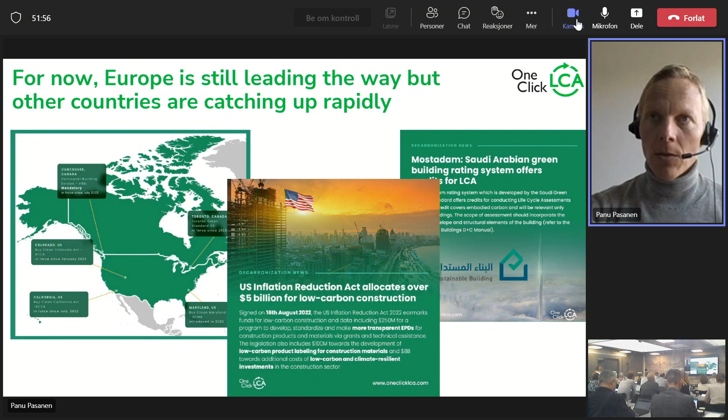And in Asia, we also see positive things evolving. And very recently, we had a first mover in the Middle East to actually implement anything resembling a building LCA there, on the voluntary side. That's it for the global context, but Europe needs to clearly keep up the pace to continue to be the leader.

We are doing a project, European Construction LCA Regulations Review, which is due to be published this fall. This project has been generously supported by the Finnish government through the Ministry of Environment, and the Dutch government through the Netherlands Enterprise Agency. So thank you for making this possible.

We cover in this work the three countries with regulations in force: Sweden, Netherlands, France; the other Nordic countries which are putting forward regulations; as well as a few other Central European countries plus UK, which have rules or systems for public projects, and where we may find the basis of future regulations for the broader market.

This is a fairly technical study, made for the people who need to design and implement regulations. So we are looking at a number of detailed parameters. We are looking at the review at an overview level: 12 countries plus EU as a block, all where governments are active in this. And then, of course, there are many countries in the EU where governments do not show any activity, or material activity as far as we can tell in this matter.

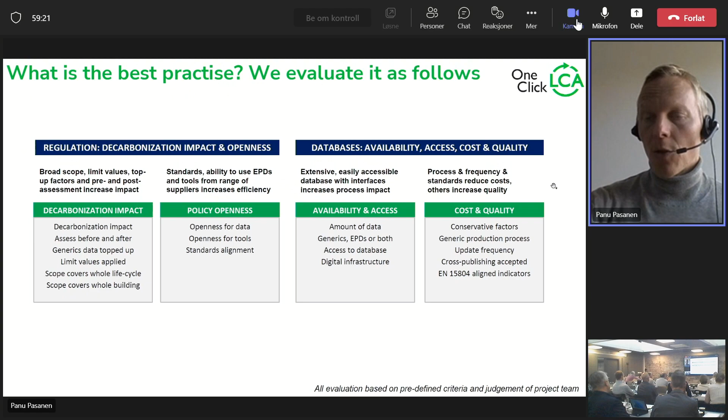The other highly impactful policies are the Dutch MPG, the Bæredygtighedsklassen, the Finnish method, and the Part Z and GLA method from the UK. All of these are among the more impactful methods. They are mainly differentiated by the level of openness, whereby the MPG and the Arrêté 2020 are extremely closed.

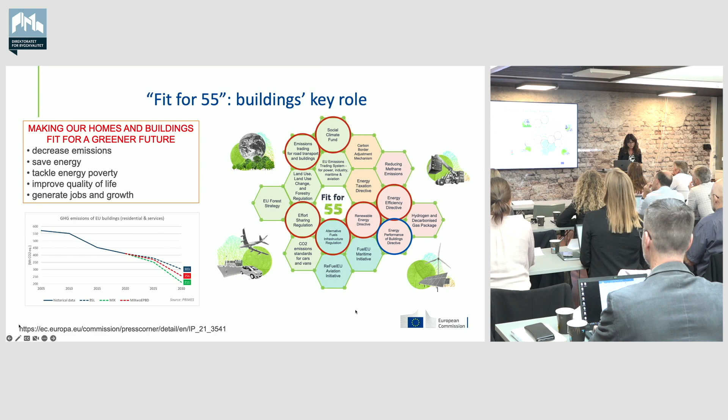If we have a look at the 2030 goals, we have the so-called Fit for 55 package, and we are really updating EU law in order to meet this target. The Energy Performance of Buildings Directive is part of this package, and the strategy is really based on three pillars: energy efficiency, energy saving, electrification, and of course boosting renewables and innovation.

I will also shortly go over the main strategic document. So you have the renovation wave. It was launched in 2020. The goal is really to double the renovation rate and to foster deep renovation.

What is very interesting is that it's a holistic approach for the built environment, and circular economy and life cycle thinking are important dimensions of this document.

To finish on the overall picture, some words on the Repower EU plan. It's following the Russian attack on Ukraine. It's the European Commission plan to reduce dependence on Russian fossil fuel and also to foster the green transition. So the Repower EU plan is a plan for energy saving, for producing clean energy, boosting renewables and diversifying energy supplies.

But this plan has an impact also on the building side. A new article is proposed to be included in the Energy Performance Directive, to include the deployment of solar technologies on commercial and public buildings and also for all new residential buildings. So it is an additional article to the EPBD. The European Commission really calls to increase the ambition and the adoption of the Fit for 55 package.

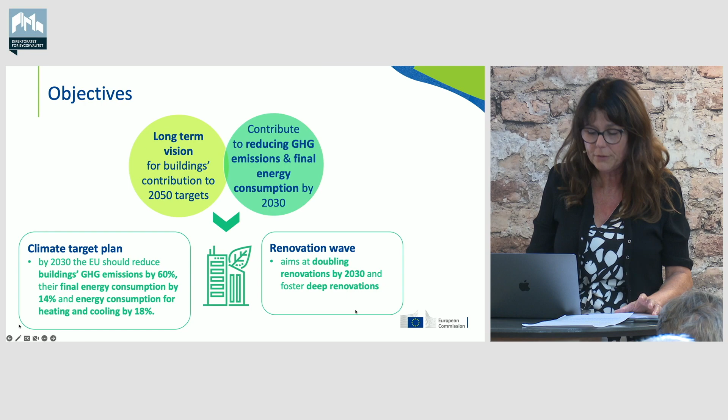The objective of the EPBD is really twofold. On one hand it's to contribute to reducing greenhouse gas emissions and final energy consumption, and with the current geopolitical context it's more important than ever. But it's also important to include the EPBD in a longer term goal, to put us on the right pathway for the 2050 decarbonization goal.

In a nutshell, you can see the 4 focus areas of the EPBD: you have renovation, of course, decarbonization, some provisions regarding modernization and system integration, and of course financing. With financing, the priority is really to the vulnerable households.

Sorry for the slide. Regarding...

If we want to have this new vision for the building stock, it was important to introduce a new definition for zero-emission building - what we mean by zero-emission building. It's really a building, for the new building and also for the overall building stock by 2050. The idea is really to have a building with very high energy performance, translating the energy efficiency principle, and it should be covered by energy from renewable sources. You also have some requirements to foster e-mobility and so on.

But if we just stop here, we won't be able to decarbonize the full building stock. We have to look beyond, to the full life cycle of the building - what's going on before and after the use of the building. That's why it's the first stage in the EPBD to introduce, to address carbon emissions. We have 2 provisions for this.

One is in the National Building Renovation Plan - they must include policy on reduction of whole life cycle greenhouse gas emissions. So we have this provision, and the other provision is to have a mandatory calculation of the whole life cycle global warming potential for new buildings and large buildings. This will be reported in EPCs.

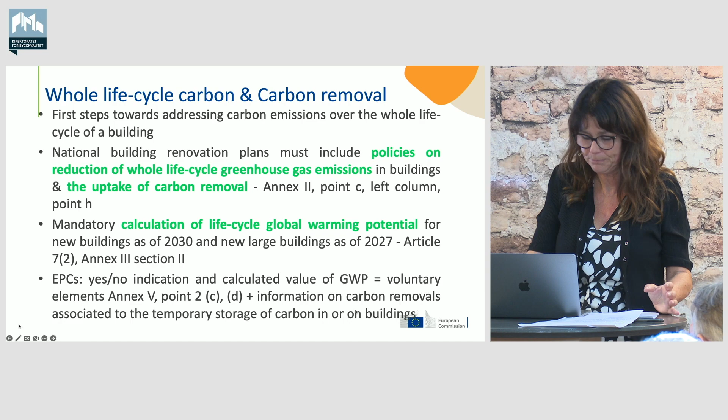Just to mention that this is a directive, so of course member states can be more ambitious, because as in the Nordic countries, you are working a lot on this. So it's to show the way also to other countries.

Regarding the global warming potential, we don't define the calculation method - we just make reference to levels. The European framework, already mentioned by other colleagues, and this method refers to the EN 15978. We are talking about tools, and there's also flexibility regarding the tool and the data.

We are referring to the construction products regulation, what it will be available. If I go very briefly regarding the other provisions, so you have some on a more short term.

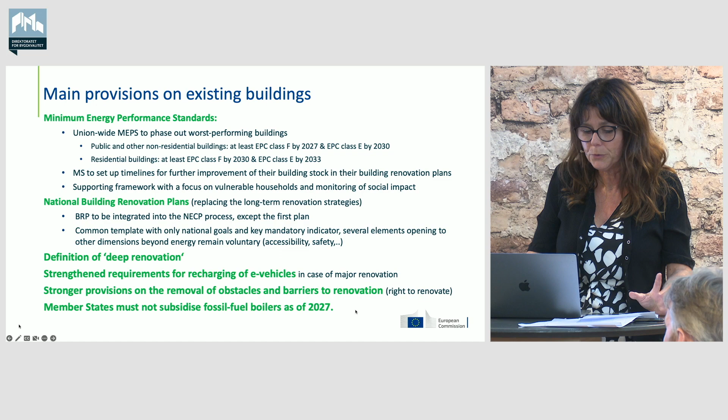The idea is really to introduce minimum energy performance standards, to trigger efficient energy renovation of buildings, starting with the worst performing ones. We have introduced also a definition of deep renovation, and various other provisions on existing buildings.

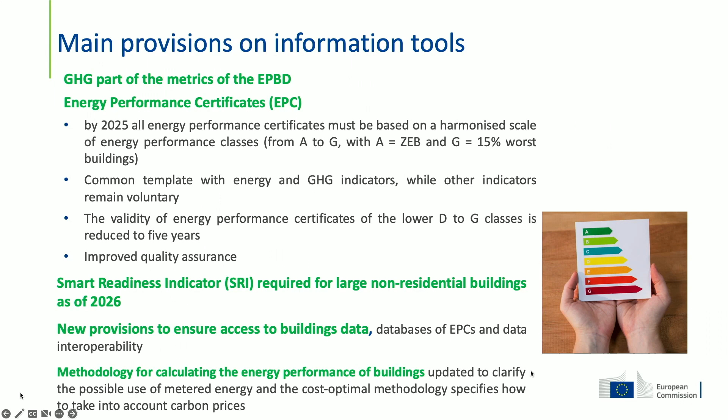Regarding the main provisions on information tools, we want to strengthen the energy performance certificates. The idea is really to have a harmonized scale at European level from A to G, and it's really a work to try to have more harmonization on this very important tool.

You have some links. If you have more information regarding the revision, I will be happy to reply to questions. Thank you.

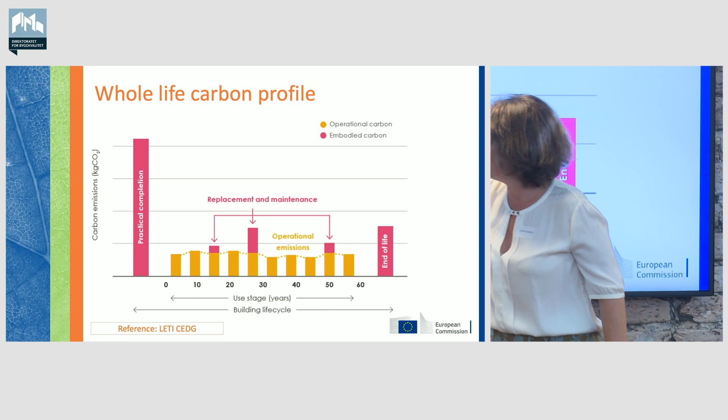What's interesting to think of, of course, is that this one we can control now. What happens here, to a part, is controlled already at this stage, because we decide how energy efficient our building will be. But we cannot know exactly what will happen here, of course it depends on many things. But what we do know is what happens here, so that's the upfront carbon becomes really something that we can steer early on.

So far, at least at the EU level and in most member states in the EU, policy has been focusing on the yellow bit. We are now looking at taking all of this into account somehow.

When it comes to policy development, I would like to split that into two steps. The first step is to start to require the assessment of whole life carbon, as we call it, and the reporting of it. The second step then would be to start to introduce different kinds of quantified targets, limit values potentially, and so on. So those are two different steps. We are currently at the first step when it comes to the EU level.

So why is this important? Well, first of all, it is a first step to be able to get to the second step one day. But also, we see it as a way of spreading knowledge and understanding of what different actors in this value chain contribute with, and how different decisions that you take during a life cycle of a building project have an impact. It is, of course, to generate data, which we need for many different reasons.

And it's really also a soft approach to start to reduce whole life carbon, because what we hear from those who have started to require the assessment and reporting is that it triggers a reduction of whole life carbon, because if you know you're doing something in your project, you would like to do it better, most likely. We already see this requirement to assess and report in some different building policies.

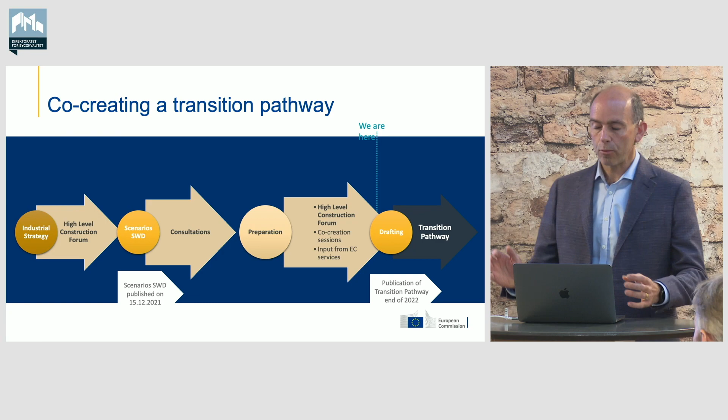We've been developing this work with the High-Level Construction Forum, which is a forum of member states and also various stakeholders, industry, NGOs, and public authorities, and so on. We published a document at the end of 2021 for consultation, and now we are going through, close to the end of the process, where we're drafting now the final transition pathway document.

It went through various stages, first of all, in the forum, setting out the scenarios for the transition. First of all, the first ideas that came in the staff working document, then more consultations and events and so on. And then we've had dedicated sessions in the forum, which have been voting on and deciding what should be the priority areas for action.

And what the transition pathway is looking at is a range of things, but whole life carbon has been voted by the forum as one of the number one priorities to look at. It's also looking more widely at circularity and waste and the renovation wave that we've heard about. But also the digital transition is very much an enabler for a lot of this.

So the collaboration tools like BIM, the automation on the building site, but also in prefabrication plants with robotics and so on, and the better use of data and product data, not only for whole life carbon assessments, but also data for improved productivity as well.

And then there is the whole side of resilience, and here, the current situation with the war in Ukraine and the high prices is very much at the heart of this now, and the pressure that's being put on supply chains, the pressure that's being put on the availability of skilled labor, and the overall competitiveness of the ecosystem. And then other challenges go right across all of this. Things like research and innovation and procurement are all relevant. So it's going to pull all this together.

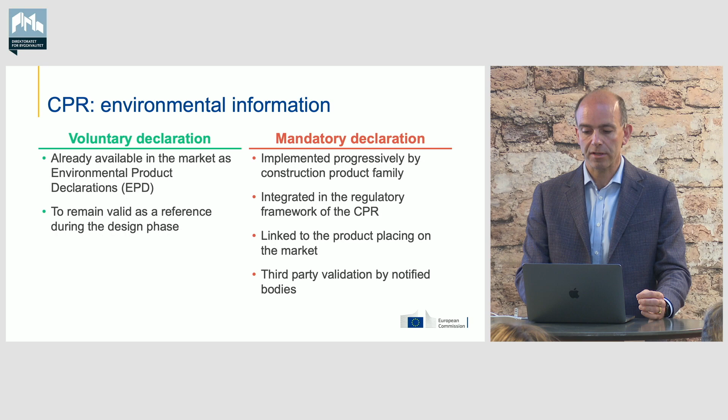Under the revision, we also want to implement progressively a set of mandatory declarations of environmental criteria, starting with global warming potential, or carbon footprint. This would be mandatory for construction products, and this process will be integrated in the regulatory framework of the CPR and linked to the placing of the product on the market. Third-party validation will be done by notified bodies. So overall, we want to ensure the harmonization of the reporting of environmental performance across the single market.

Diving more into the detail of the CPR revision, especially when it comes to how we want to make a circular economy happen in construction, there are several elements that will facilitate circularity, and they are spread across the regulation, as you can see, in various different articles.

But in general, we want to make it easier for reused and remanufactured products to access the market. We want to improve information, especially digital information, relating to circularity. We want to offer maximum flexibility for circular solutions to level the playing field with new products, and we want to make it easier to avoid surplus products becoming waste and to close the material cycles.

So in order to meet the EU-wide climate and energy targets, it's also vital that we direct investments towards sustainable projects and activities. And to achieve this, we need a common language and a clear definition of what is sustainable.

This is why we have an action plan on financing sustainable growth and the classification system for sustainable economic activities called the EU taxonomy, and a first delegated act for sustainable activities for climate change adaptation and mitigation was published in December 2021, and it's in force since January this year.

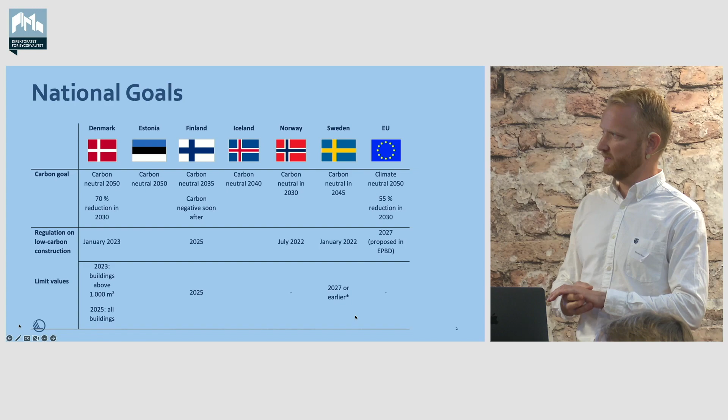When it comes to the regulation and implementation of building LCA within the construction or building codes, some countries are working on this, and some have already implemented. We saw a little bit about this in Pano's presentation earlier, but Sweden and Norway have already implemented the first set of regulation on this. Denmark will follow shortly in January next year, and Finland will follow in 2025, maybe 2024. We'll see.

When it comes to the limit values, Denmark will include a limit value already in the first set of legislation for buildings above 1,000 square meters. Finland will include limit values as well, and Sweden is already looking into what should be the next step of the regulation. Estonia and Iceland are working on the subject, developing proposals for methods, but haven't made any political decisions yet.

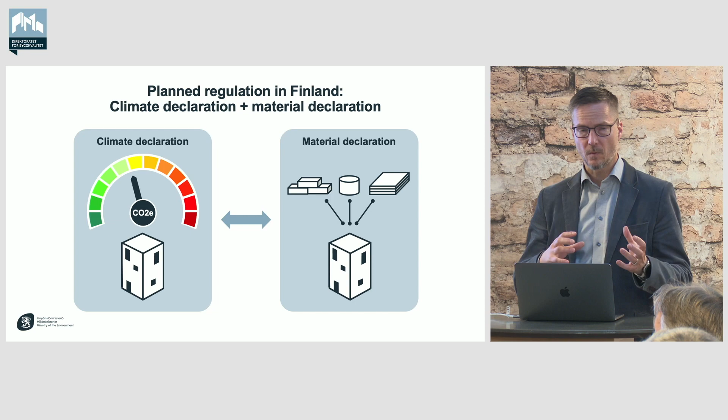But what I will do is explain to you what is the framework that is required for the limit values. As just has been explained, we are going to have 2 new decrees, one on the climate side and one on the material side, and these are both linked to the question of limit values.

If we first look at the climate declaration side, it's going to include information on carbon footprint. This is going to be mandatory for all buildings that will require a building permit and that need to have an energy performance certificate.

If your building requires an energy performance certificate, then it will require a climate declaration. And for new buildings that mustn't exceed a certain E value in their energy performance certificate, there will also be a limit value. So we are trying to do this hand in hand with the existing energy performance regulation.

Then there is another side to this climate declaration, which is what we call with the umbrella term carbon handprint. These are the potential climate benefits based on European standards that include the classic module D circular economy benefits, long-term carbon storages. We heard interesting news about those earlier today when the European level plans were presented.

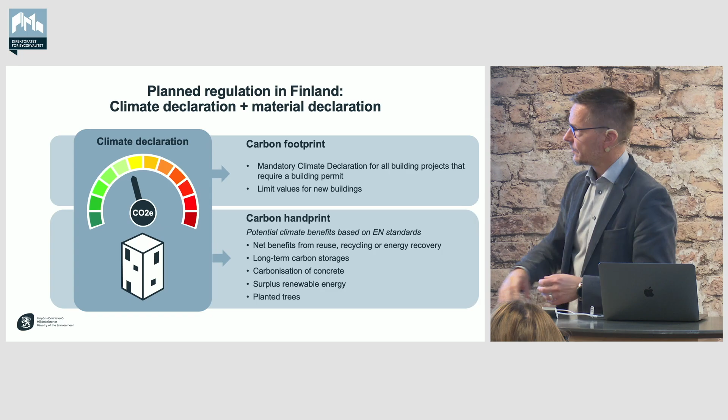Then we have carbonization of concrete, surplus renewable energy, and we are also looking at what could be the role of trees. If you plant new trees, say on a brownfield site, how much can they sequester carbon during the assessment period? However, the limit values will only apply to the footprint side.

There wouldn't be limits for the handprint, but we hope to boost the markets to compete with the size of the handprint.

Then what's linked to this is indeed the material declaration. It's going to include information on building components of the object of the assessment, materials within these components, at the moment breaking down to say 12 different categories, and then the origin of materials, whether they are renewable or non-renewable, recycled or even reused, or if there are any harmful substances.

And this is linked to the limit value discussion so that the scope will come from here. So what you will calculate in your life cycle assessment is basically the scope of the building components that you have in your material declaration.

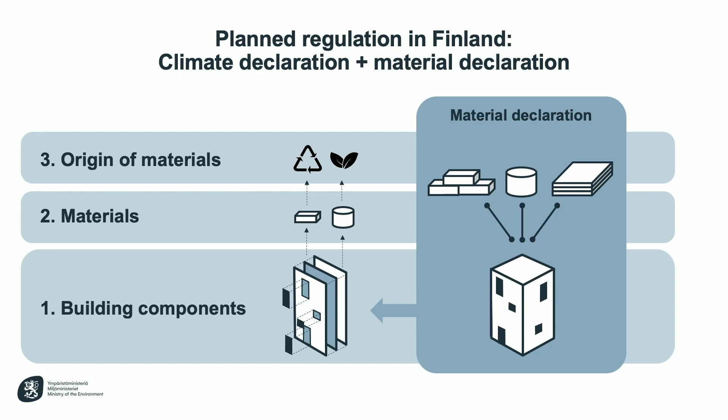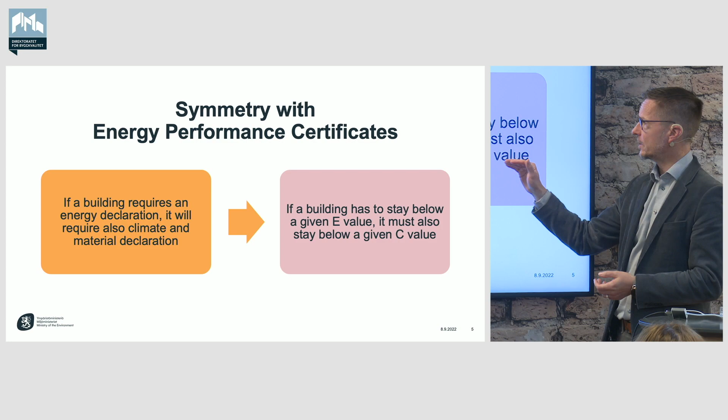But this document will serve other purposes as well than just the climate declaration. So what's been important for us is that we would like to seek symmetry with energy regulation. So again, if a building in Finland requires an energy declaration, it will also require climate and a material declaration. And if it has to stay below a given E value, it must also stay below a given C or carbon value.

So we felt that this is important for the sector, which has learned that okay, these and these building typologies need to go through a certain process, and there are buildings that are excused of that burden, if you will. So we want to keep it the same way.

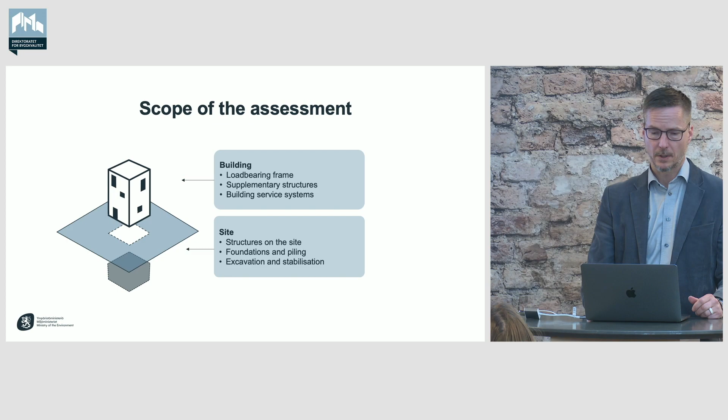So in terms of the scope that is included for the limit value assessment, we will be looking at the building and the site separately, and the limits would only apply to the building. So its frame, whether it's underground or above ground, doesn't matter.

But then what's on the site, say foundations and piling and excavation and stabilization, these we consider are choices made in city planning, not in the building design. And therefore we are planning on excluding those from the limit values. And of course the limit values will be defined for different use classes separately.

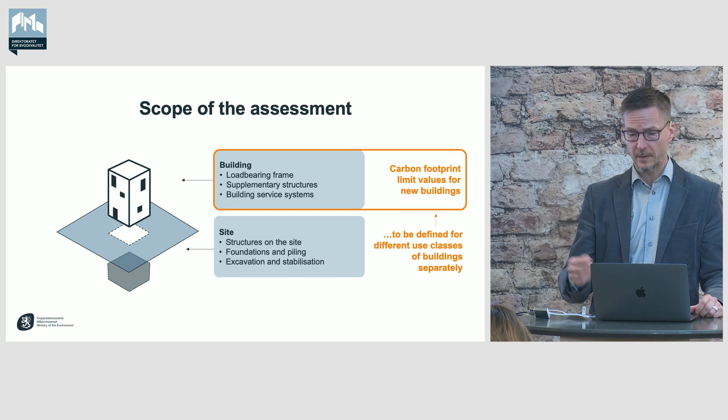So how to speed and enhance the uptake of the limit value thinking then? Our recipe for that would be building information model. When in the future one would be applying for a building permit, we have planned that you would need to give in, also upload your building information model. That's going to be a mandatory requirement for getting a building permit application.

And from that model, we would hope that the professionals would automatically generate the material quantities that you need in your calculation of limit values, because that's, as many of us know, the most time-consuming stage in life cycle assessment, and the one that is most prone to errors, and in which the machines are better than humans.

So this material quantity takeoff would be used then for both material declaration and climate declaration, and we would get from this side the material contents for building products, and for here we are looking at the emissions of building products.

And the data for which the limit values would then be calculated with would come from either environmental product declarations or from the existing national generic database, which is available for everybody who is interested in English at the website co2data.fi.

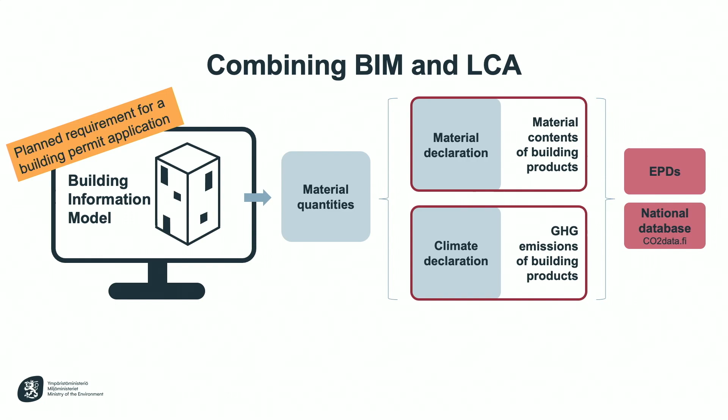Still something about the building information model: we are also planning to store that in IFC format for future use, so the information wouldn't just be used for making the limit value regulation possible. The overall thinking is that the BIM tool would be communicating with the LCA tool, and you would iteratively get quantities out from your BIM tool to your LCA tool, and then the LCA tool would give feedback to your design so that you can secure that you will keep below the given limit value throughout the design process.

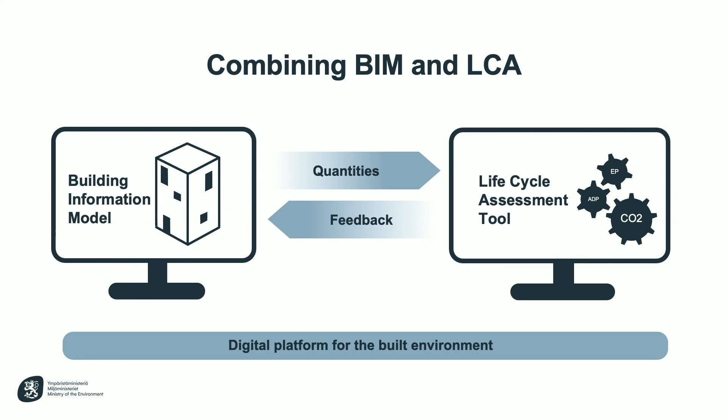And all this would then be saved or uploaded to a digital platform for the built environment, which is going to cover, as the name implies, the entire built environment, from product level to buildings to cities and to entire countries. So we would like to start following the flows of carbon and flows of materials, and currently we are building a digital platform for this subset of the entire value chain.

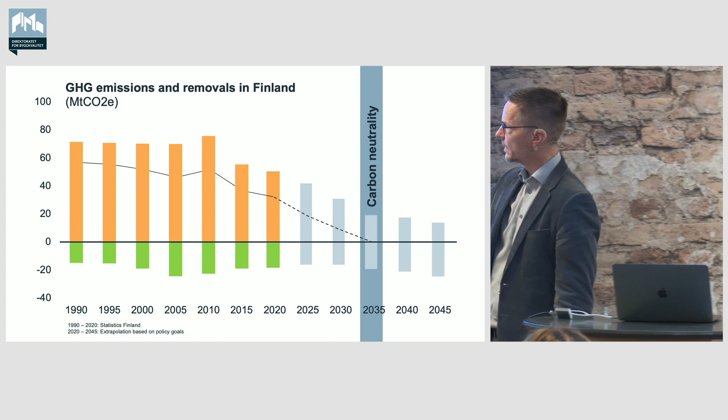And I'd like to finish with the quest we also have ahead of us: our goal to become carbon neutral in 2035 requires that we very well understand how much of this emission side we need to push down, how much of this comprises new buildings, and how can we, in a compatible manner, compare the emissions that come from construction projects to national climate goals. That's something that I believe requires methodological development, but is also super helpful if we can get it working, because otherwise I don't ultimately see a very big point in the exercise of making LCA if it doesn't really support your country's climate goal.

And furthermore, as we have the goal of becoming carbon negative, then increasing the sinks here also justifies our approach to including the carbon handprint side, so that we can start to manage that also in the context of the built environment. This was the latest from Finland.

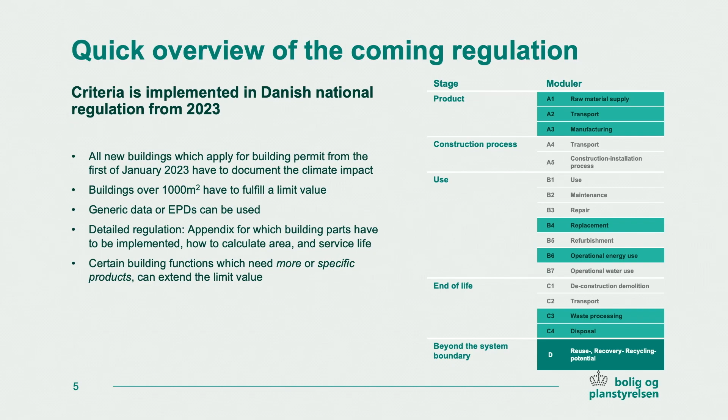And then we have been working quite intensively, also together with BUILD, the research institute, on a few buildings which we assume will not be able to be within the limit values because they have certain functions, for example some hospitals or some laboratories. So we have been working on some certain regulation for them, but I will come into that in a second.

And that was the ambition they wanted to set in the beginning, and this was the baseline for the political agreement. Then we have been working on how to make the regulation based on that, and we could not go too far away from the baseline which has been set there, the methodological basis. So we were kind of stuck into a lot of things, but we worked with it in the best possible way.

Shortly to the report from BUILD, they looked into just 60 buildings, which is not a lot if you think about that we are building like 7,000 buildings in Denmark per year. But it was the best baseline we had back then.

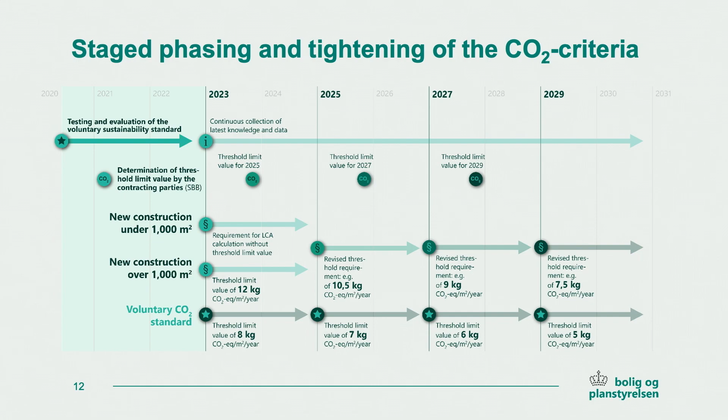These are a lot of points, and I will not have time to go into all of them, but we will, for example, look into representing the existing building mass with more cases than 60 buildings. Out of that, the political parties can decide how much they want to tighten them. We also want to look into where we should put the limit values in regards to our Danish carbon budget, and how to do it.

How can we make the link between our LCA criteria and the carbon budget, and is it even possible? We will also look into whether we can maybe add some more modules or phases of the life cycle of a building.

Yeah, and a lot more things, as you can see here, but I think my time is over. Thank you very much.

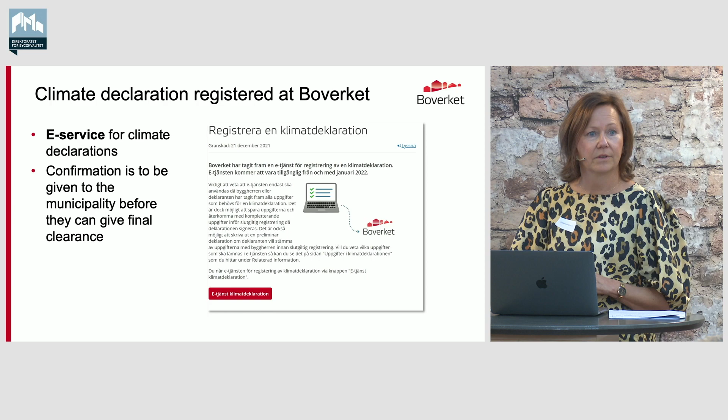We're responsible for the supervision. We will check the accuracy and whether the data that they send in the declaration are reasonable. The developer needs to save the basis for 5 years, so we can request the basis, more information that they register to us, where we can check the quality of the data.

We are now building up an e-service so they can handle this basis in an easy way, and we try to adjust to the type of tools that they are using in the sector.

So some of the important elements for us when we do this supervision is to check level of coverage, how many products are included in the climate declaration. They also need to verify the products used. At least half of the products from the climate impact, they need to verify that they really put this product into the building. We also will check when they made this final calculation.

We know in the early stages you don't have all the information, so we want to really see when this calculation is made, but also if there have been updates. We know that they sometimes change the products that were calculated in the beginning. We want to know if there have been any changes that might affect the climate impact.

These are important issues when we introduce limit values. So we're looking at putting a level on the coverage, also a level on the verification, and also setting a date: when can you make this climate declaration, when can you send it in to us, and also clarifying the updates that are needed.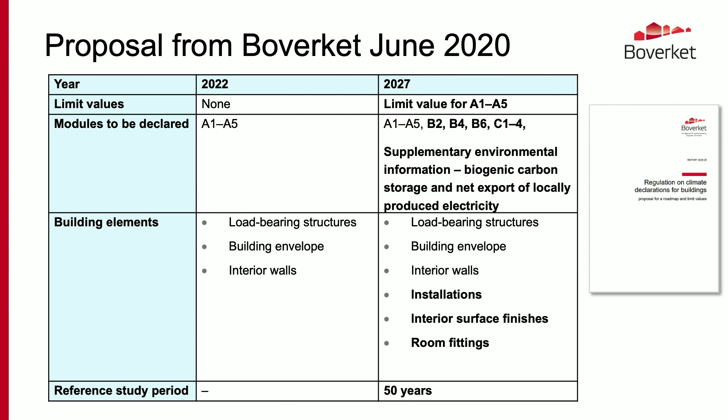So our proposal from 2020 was to introduce limit values for module A1 to A5, and this is what we are working on now. But also to expand the climate declaration to include more modules, all building life cycle stages, and supplementary environmental information. We also propose including more building elements, installations, interior surface finishes, and room fittings, and a reference study period of 50 years. This report is also available in English if you want more information.

The study on reference values from the Royal Institute of Technology looks at climate impact from construction of new buildings built during 2015 to 2020. This report is from December 2021, and we now have reference values for detached houses, multi-dwelling blocks, offices, and nursery schools and schools. It's a small study of 68 buildings, but we think it's quite robust material for us to continue with on limit values.

So the proposal presented at the hearing in late August was that it looks possible to introduce limit values in 2025. We're working on a proposal, and I really want to highlight this is still a proposal for new buildings and extensions, for module A1 to A5, and we also include more building elements in those limit values.

But we also propose that at the same time, in 2025, we extend the climate declaration, more or less according to our 2020 report proposal, to the whole life cycle, more building elements, and also expand it to extensions, reconstruction, and earthworks. But we really need to look closer at whether the industry is ready for this next step and to include so many things. We need to look closer and make an impact assessment.

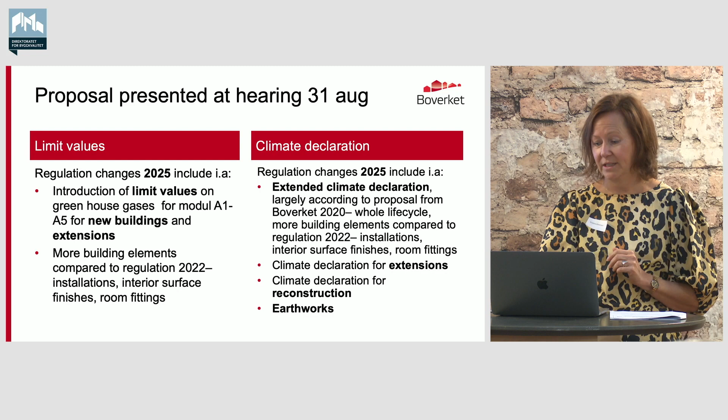I want to give you some hint on the limits we're working on—this is a complex picture and we have too short a time, but I'll try anyway. This covers all 68 buildings in the study across five different building types. We've set a line at the top at the 75th percentile, meaning 75% of the studied buildings, not the level of emissions, are below that line. That's what we call our baseline or reference value.

So we're looking now at whether we should decrease emissions according to that line. Our proposal for 2020 was 20 or 30% lower than a reference value, that reference value being the 75th percentile. That is what we are currently working on.

The proposal at the hearing was to introduce a limit value at the median, which is a little above 20%—meaning less than 20% lower—for all building types except nursery schools. This is something we're looking closer at. At the public hearing, they thought this was a reasonable introduction of limit values, but we need to look closer, especially at the effect on small and medium-sized companies. The big companies are quite prepared for this.

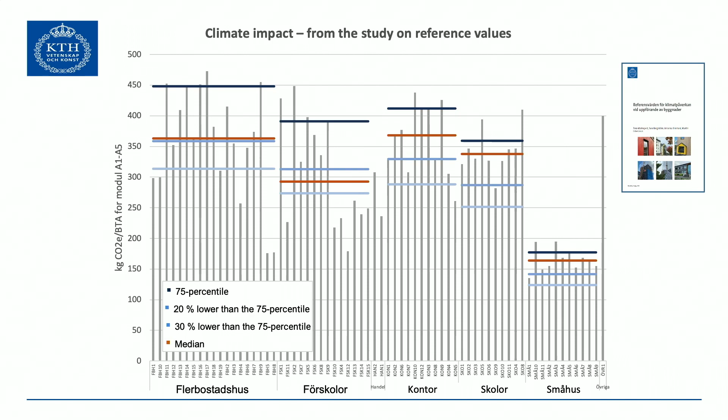We are also looking on limit values after 2025. We know that the industry wants to be prepared for the next step. So now we are looking closer at whether we should change these limit values every 5 years. We think it's too often to do that every 2nd or 3rd year, which industry suggests.

But having regulation in place is not a quick fix. Every 2 or 3 years we need to study and see the effect of the previous legislation. So we're looking at different levels, alternative 1 and 2, 25% or 50% lower, as the next step. And for detached houses, we see that the potential is not as big, so we're looking at different levels for those. So finally, my last slide.

This is a really important thing for us now to look closer on. We have a generic database from Boverket. We have construction products which are conservatively set around 25% higher than the average. The purpose of this is that we want a stronger incentive for designers to choose product-specific EPD data or specific data in the calculations and declaration, but also to give incentive for manufacturers to produce more EPDs, and also to produce products with lower climate impact.

And we can already see this effect. So for us, it's important to consider whether we should continue with these conservative values in our database with limit values. It depends on what we want to steer, while we are waiting for the legislation to be in place in the EU, so we can require specific data, because that is what we are interested in. We want to know what they actually have in the building, not rely on our database with generic data.

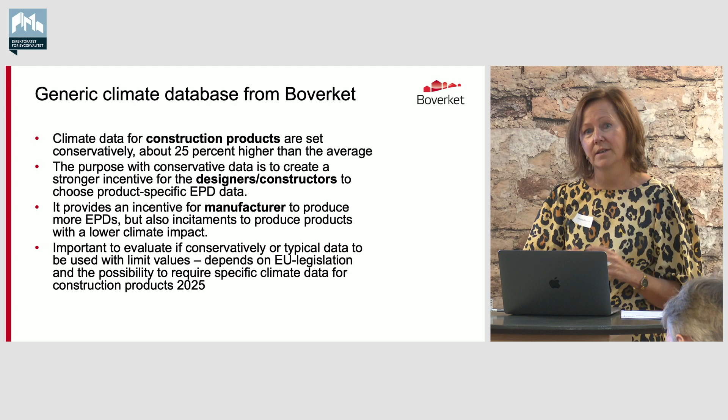So this is something really important for us to look closer at - how can we steer this until 2025? And then when we have the EU legislation in place, we will probably adjust to a typical value. So that was my last slide, and we have more information on our website, and you're welcome to contact me if you have any questions. Thank you.

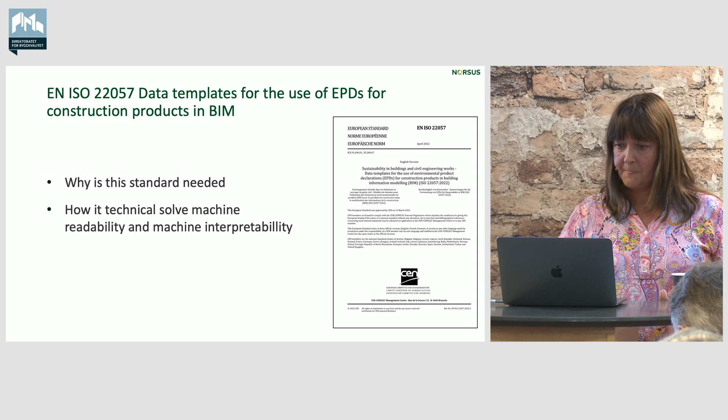So, as you can see, and probably know, it has been a stepwise development of EPD. The EPD started in the 90s, the need for communicating the complex data in an LCA of products, and products in general, not only for construction products. And to me, the EPD is an executive summary of the LCA, specified in a standardized way. In the first years - 10, 15, 20 years - it was more of a static document, a document readable for people, provided as a PDF file.

Then it started the need for digital EPDs, as we saw that EPD information, especially in the construction sector, is not that the EPD is the end information. It's needed for building assessment, and then machine readable - the level of numbers was suddenly used. But what we saw and see is those digital EPDs that are available, to some extent they are still, even though they are machine readable, they need people to read the information, do some recalculation often, and especially regarding scenarios that need to be recalculated, or other information - I will come back to that.

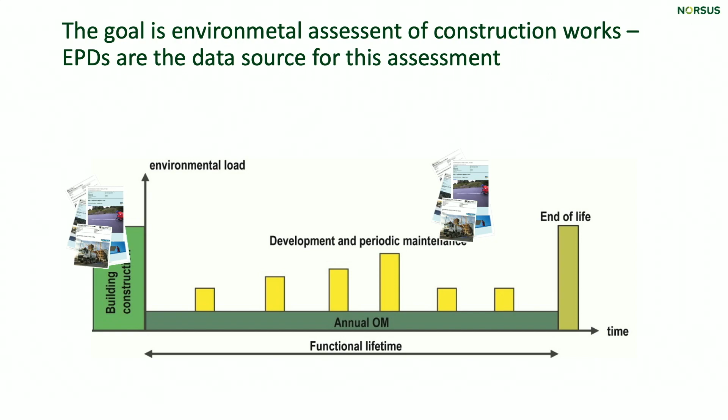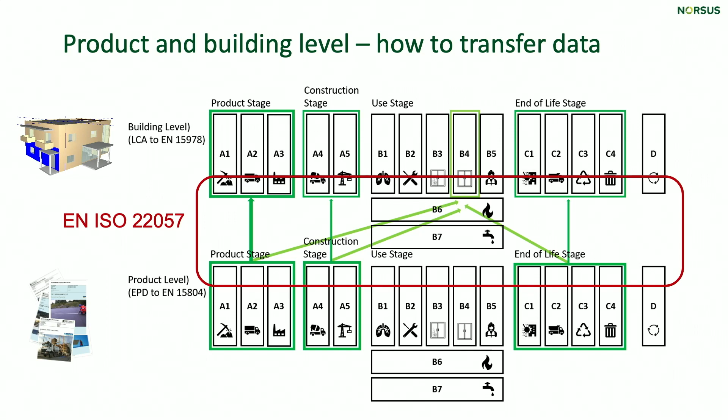So what this is all about is how this data can be transferred, digitalized, without people needing to read the data. So this standard is about how all the information can be transferred. It doesn't say how the formulas for doing the building assessment work, because that is dealt with in EN 15978, but this is about how the data are transferred, exchanged from the manufacturers to the specific project.

As I said, this is a standard developed both as a joint work under the Vienna Agreement, as it's called in the standardization world. It's both representing the international standard ISO 21930 and 15804. It actually addresses both the new 15804 plus A2 and also makes the possibility to use the data from the previous version, as we know that those EPDs are still available and need to be available for some years still.

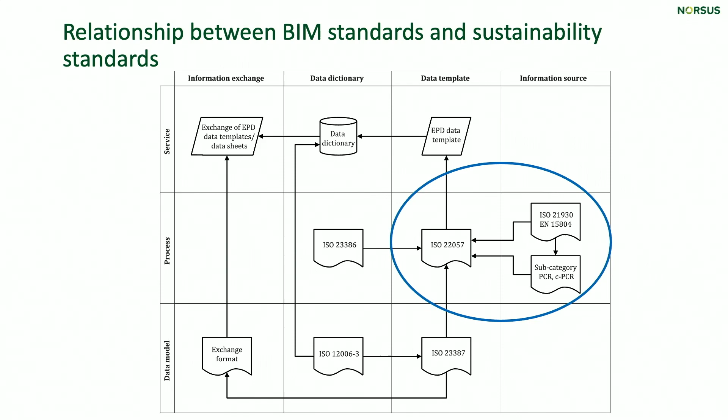What has been very important in this standardization work is the fact that BIM exists as a concept—a lot of information exchanged under the umbrella of building information modeling. For this work, EPD data or environmental data is not any special information needed to be dealt with differently. So it's important for us in both CEN and ISO to make sure that what we develop for transfer and exchange of environmental EPD data shall follow the same way that other information in the construction sector is exchanged. That has been very important.

By that, we have this standard. The background standard for product EPD is 15804. For the building assessment, it's 15978. But as much as important, this standard 23387, data structure for data templates, has been the most important standard for this work.

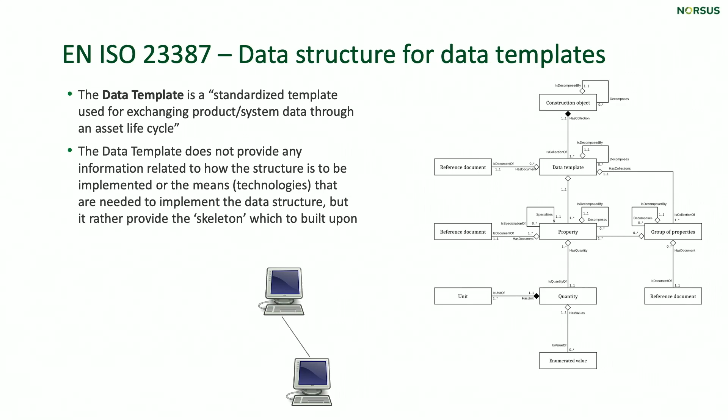It's about what we call data templates, product data templates. A template is a standardized way of exchanging product or system data through the life cycle. This is about how computers can understand different types of information. It's not for environmental experts like me, but it's bridging the environmental knowledge until the use of the data in the BIM context, and how computer scientists can actually make use of the data. So I'm not telling you anything about the sheet.

What's also important for us was that, yes, the goal is the environmental assessment, but also, as Matti said, it's the exchange between the BIM model and the life cycle assessment data, how that can interact, which is on the right side. On the left side, you see that EPD data follows the ISO 22057 data template format.

But as you know, for doing a building assessment, you need other data too. It could be generic EPD data, or data like the life cycle data for Finnish electricity production. Today there's no EPD for that, but it makes it possible to transfer or develop all kinds of data needed for the environmental assessment in the same format, the PDT structure.

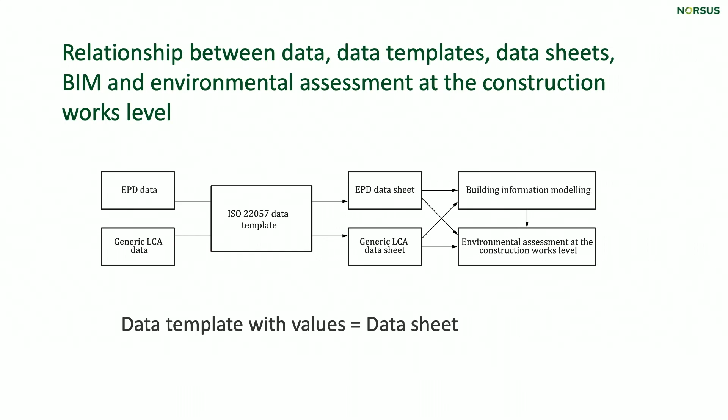By that we can fill the templates with actual data, and then we call it a data sheet. So a template for whatever kind of information for a construction product, filled with information—could be EPD information—then we have a product data sheet for that specific construction product, along with other information about the product.

So all those properties in 15804 have been converted into 22057. By that I'm saying that the EPDs of today do not fulfill all shall requirements in the EPD in a digitalized and easily accessed way.

So we have information about the general information about who owns the EPD, how long it is valid, what is the methodological framework, and also all the results and technical information for scenario development is included in this.

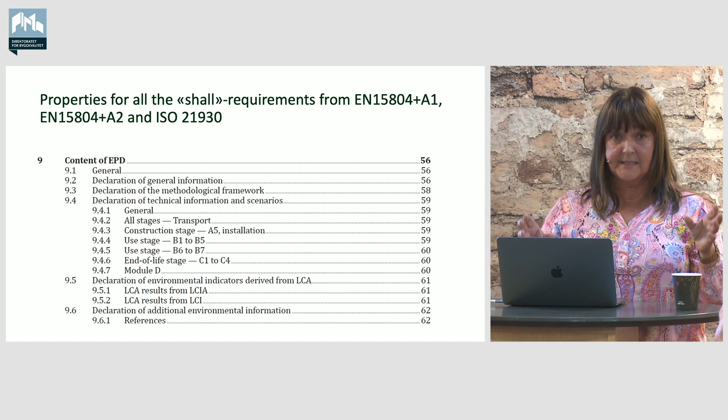And what do I mean by that? For the computer to understand this, every single property has its own identifier. It means that, for instance, global warming potential has a unique identifier, which is a long number of letters and numbers. That means the computer will understand what global warming potential biogenic means, and it has the possibility to understand that this is emitted in module A1 to A3, or it understands the concept of B4.

So everything of this is made easy for those making LCA tools to use the data. So we have made all the properties available.

So what we see is that scenarios may be difficult, but important. Those of you familiar with 15804 know that you shall describe the technical information, the background information you have used to develop your scenario. We see that in many EPDs today, that information is hardly there, or is so untransparent that you can't use it to do anything relevant with the scenario.

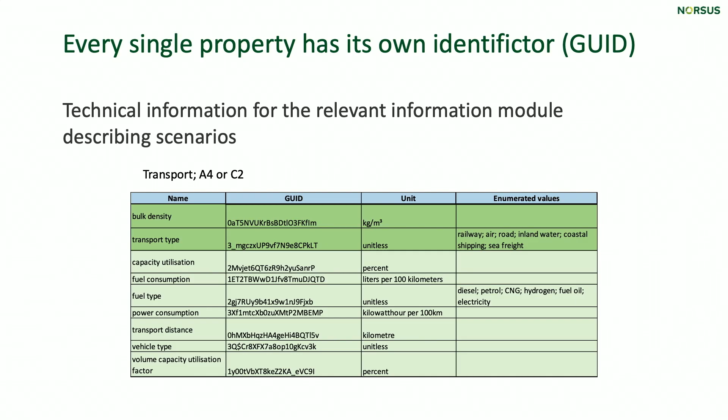And then it makes it easy for tool makers to build a formula to recalculate the scenario from 50 kilometers to 248, for instance. Or it says, no, it's not by truck, I would like to have it all by train. So it makes it easier to change the scenarios—it can be used fully, or partly, using some of the information. For instance, fuel type and consumption stay the same, but you change the transportation distance. All of this is available in the standard to make the scenarios more specific for your specific project.

So what I would like to say at the end is that the advantage is that by using those developing EPDs, by also adding on the 22057 that follows the PDT concept, as for all other information related to construction products, that's important. So manufacturers do not have to have different ways of documenting their products. It's not a standalone approach. It's the same as for other information. And it forces EPDs to follow all requirements in 15804 and make the data machine interpretable, with less need for calculation.

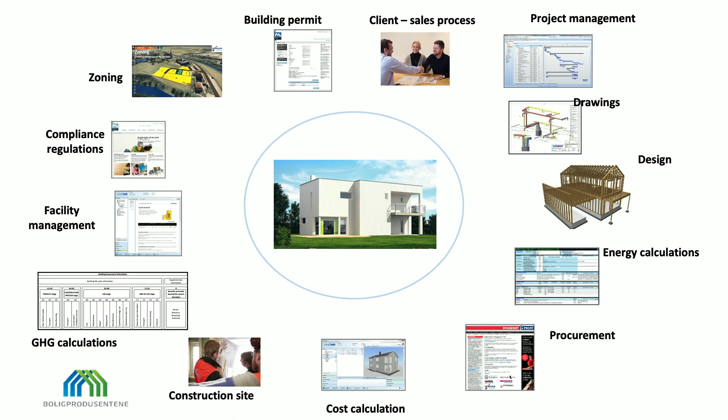When we have this building, there are many processes related to the planning, design, etc. of this building. Each of these processes has been handled as silos, as independent work. We want to connect that. We want to see this as a whole, and we want to have the BIM model with the information as the core of it, so that the same type of information does not have to be typed in, punched in several times.

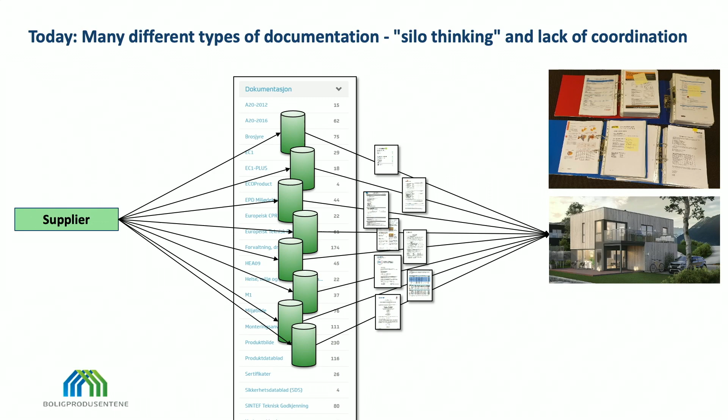If we look at product documentation, this is the different types of product documentation we have in the Norwegian database on materials, Byggkvalitet. The suppliers have to provide a lot of different documentation for different purposes. And all this documentation is printed as paper or published as PDFs - piles of them - and nobody can actually use all the information in it. What we want is one-stop shopping.

And that is where the data template concept comes in. So all those who want their information to be a part of the product documentation, whether it's BREEAM, whether it's SINTEF technical approval, or the directorate here in Norway with information, they must get that information, those properties, into the data templates. So the suppliers of materials have one place to put all the information. And these data templates should be according to the European and international standards, as Anne referred to. So this is not something specific for Norway - this is the way to do it.

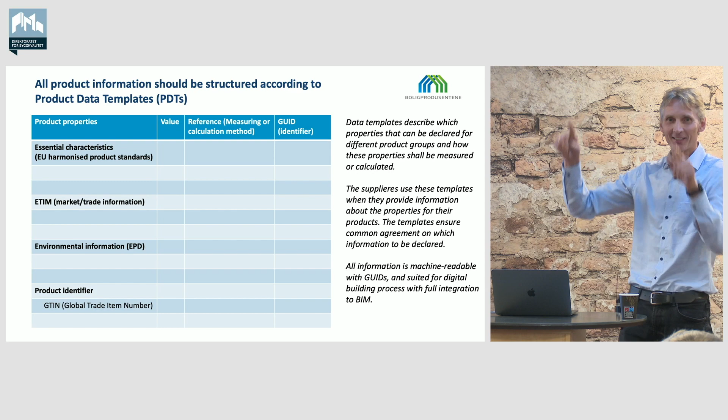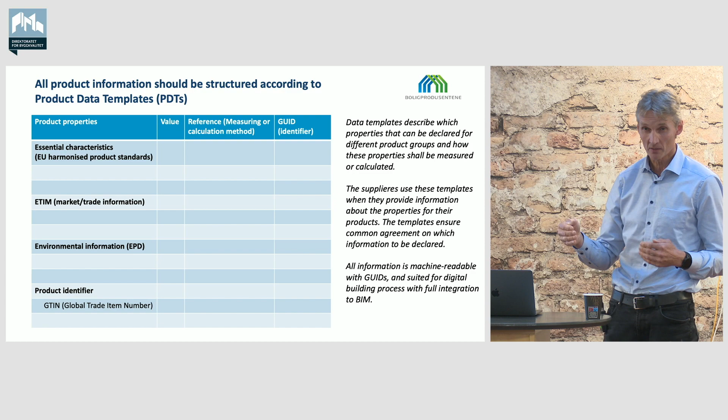To present my way, my understanding of this data template, not the rather complicated sketch that Anne presented: the data template consists of different property groups where environmental information is one property group and the EPD information is one subgroup within the environmental information. We have these properties, that is essential characteristics, which you must declare according to the harmonized product standards and the construction products regulation. We have market information, color of products, size, weight, etc., environmental information, and we have the product identifier.

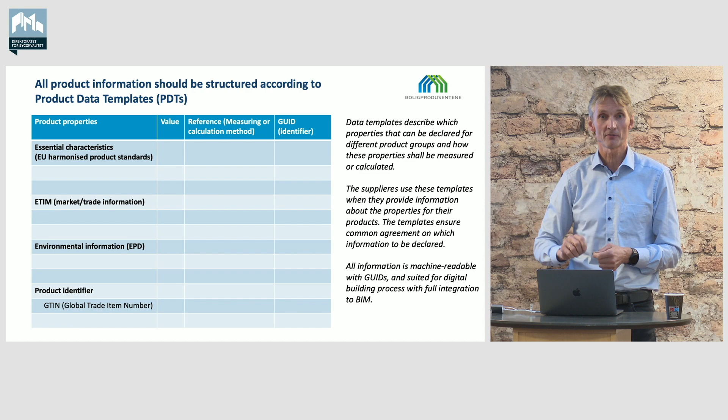All properties are declared in these data templates, and data templates are developed for each product group. In the template, we have the reference for all of these values - how this property, the value for the property, is meant to be measured or calculated. A precise, very exact definition. And we have this GUID, this Global Unique Identifier, which is 22 characters and unique - it's what the computers use to know what that value for that property actually means.

We have been working on this for many years now. In 2018, my association took the leadership of the committee in Standards Norway working on data templates for building and construction. This was done in cooperation with a lot of stakeholders in the industry and with the authorities.

In 2019, we in the association went out and challenged all the material manufacturer suppliers to provide machine-readable product information according to the PDT concept within 2022. We had three years on that, and we had COVID in between.

In 2020, we had a Seeing is Believing session at our annual Home Builder Conference, where we presented how CO2 emission global warming potential calculation could be done automatically and based on machine-readable PDT information. What we did there was this:

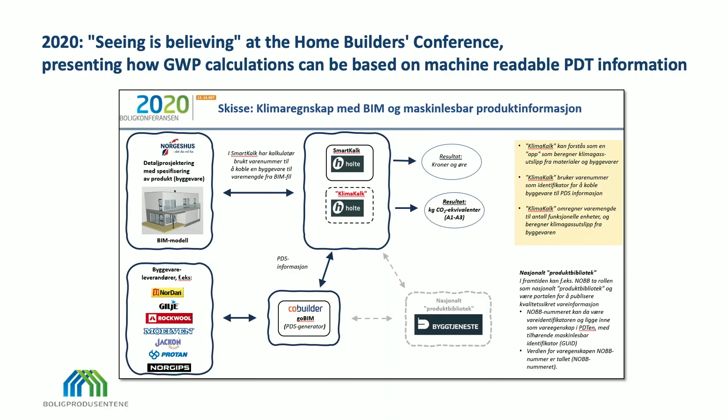So we thought, what if you substitute the Norwegian kroner per material with CO2 per material? They have the account, they have the amount, it's just a change. They showed how that could be done based on this PDT concept, and we had Cobuilder, a Norwegian software company, who helped us there.

This was in 2020, just to show that it is possible. Last year, 2021, we challenged Byggtjeneste to present EPD information according to this standard of ANNE, ISO 22057.

Byggtjeneste has a sort of database. They've got all the material suppliers, or most of them in Norway, presenting their data. When you go in there, you can get a lot of information - here, for instance, Rockwool thermal insulation, with different types of product information, including EPD environmental declarations. But this is provided as PDFs, which is not very helpful.

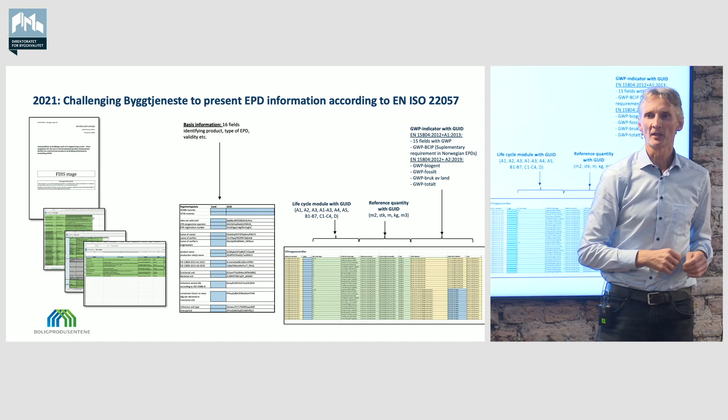So we challenged them and said, we have this draft standard from ANNE. There are a lot of annexes in it, a little too many for the suppliers to fill in everything. So we said, what is the minimum for you to deliver to be according to this 22057 format?

We scoped that down and gave it to Byggtjeneste and said, let your producers fill in this. We showed how it could be done with an example. You have existing EPDs - this is the information you should put in the template, with GUIDs, with everything structured according to that 22057.

We also needed some additional requirements related to biogenic carbon, which is not covered very well in the 15804 A1 version of the standard. It is not covered, so we have some Norwegian supplementary additional requirements stating that. But in total it was not too many values they had to transfer, and then this could be presented according to the PDT template.

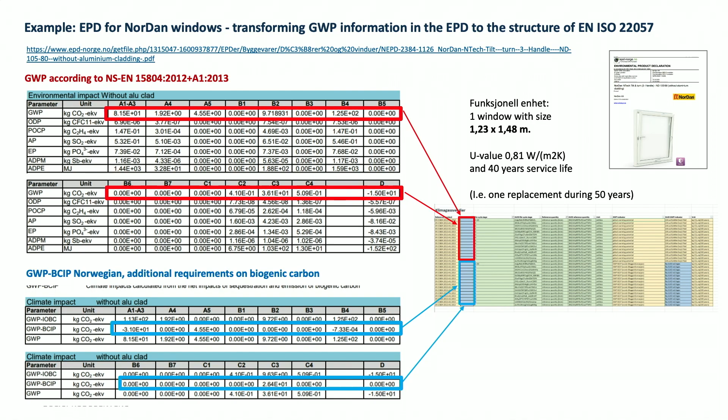And in April 2022 this year, they presented this. They have, via an API, now software developers can get this information from Byggtjeneste with the CO2 GWP information from the EPDs. We have not taken the rest of the environmental information in the EPDs.

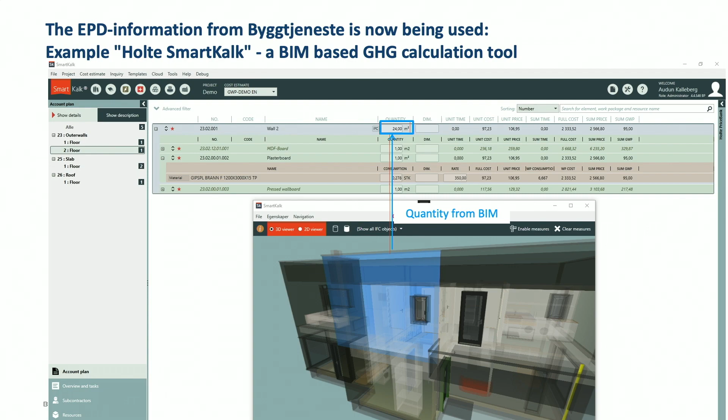As an example, we have this Holte, which has a SmartKalk cost calculation program, which used this BIM information, IFC exchange, and coupled it with cost prices. Now they get the quantity from the BIM, the number of square meters of a product.

They get the CO2 or the GWP information from Byggtjeneste through the API with the EPD number as identifier, and together with the price you get the GWP value, the number, done the same way.

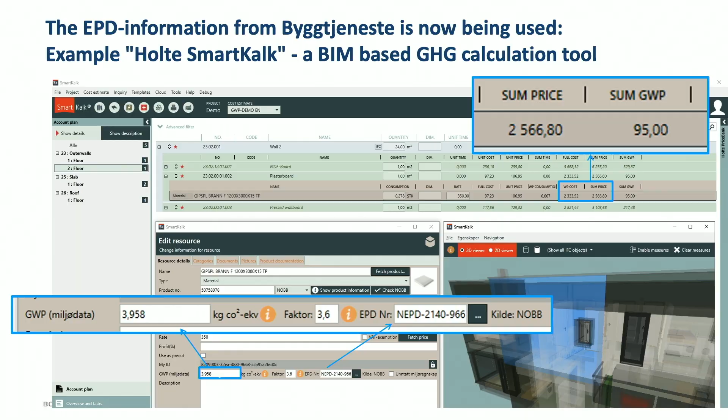But we have some challenges. One is conversion factors. The GWP calculation is very simple - it's just an amount multiplied by an emission factor and then summed up for all the materials. The problem is we have so many different units.

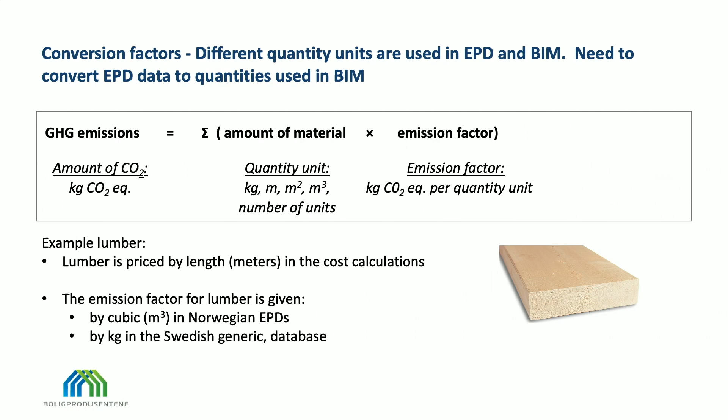A simple example: lumber, which in the industry is normally priced by length, where in the EPD, in the Norwegian EPDs, it's in cubic meters, and in the Swedish Boverket database, it is per kilo. Nobody buys lumber per kilo, so there has to be a conversion, and that is a little tricky because there are so many units. These are the units in the Byggtjeneste database, a lot of them, different, but we need to keep track of that.

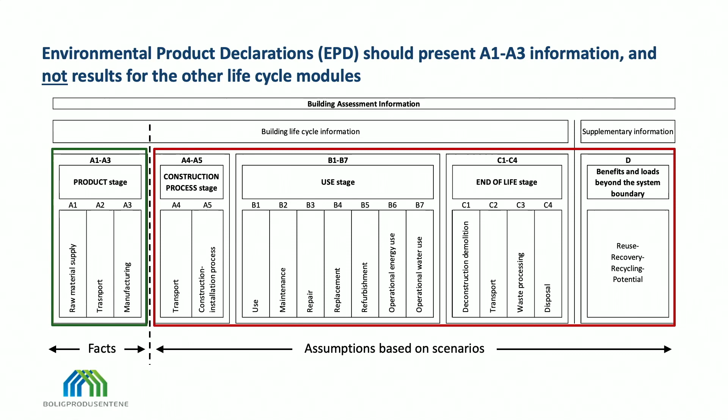Another challenge is, as Anne said, the EPDs are not static. They shouldn't be considered as that. So what I say is actually that the EPDs should be only A1 to A3 - that is the facts. The rest is scenarios, and the scenarios and results should be left to the greenhouse gas calculation tool. Maybe the EPD should have some additional information you need to make these scenarios, if that information is not already in the product data template or product data sheet, because some of the information you need assumptions for is also valid for other properties. The lifespan, expected lifespan of the product, is also important for many other properties. So we need to see this as a whole.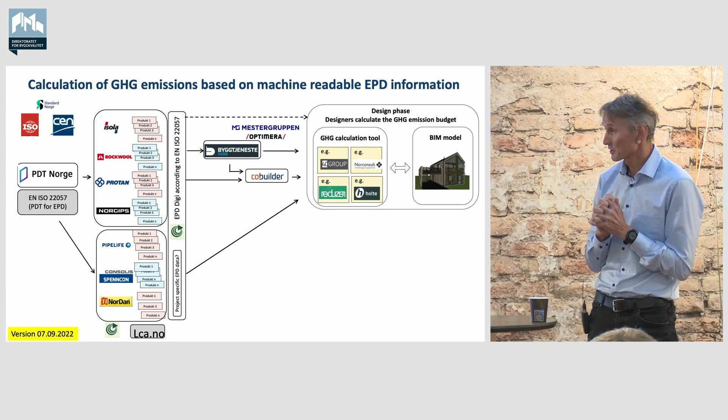Going back to this slide from the 2020 Seeing is Believing, this was a very simple slide. It was a builder with a BIM model, it was this smart calc program, and it was suppliers showing how you could send the information. This slide has been developed in close cooperation with the Association of the Norwegian Manufacturers of Construction Products. In a way, what we've ended up with is up here on the right, the design phase. We have the BIM model, we have some calculation tools, whether this is Holte Smart Calc, Reduzer, 4Group, Norconsult - there are several now jumping at this because they get the data.

The data are available, and they calculate, and they get the information through, for instance, Byggtjeneste or some other suppliers. But the data are owned by the producers, by the manufacturers - they own the data. And these are not databases, these are more hubs for transporting and exchanging information. So the manufacturers, whether it's product-specific EPDs or project-specific EPDs, they all communicate the same way and through this format. We also have PDT Norway, which are developing these PDTs, not only for EPD but for all information you need about products. For the EPD information, it is in line with 22057.

And we have here, during the construction, on the construction site, the contractor gets this budget from the designer, and they have to show that they fulfill, that they comply with that budget. It's like an economic account - you have a budget, but all the invoices show whether you are in line or not. So they have to gather information based on the actual products they have used. And then what if they don't meet that? Well, then they have some follow-up process, because when we get a limit, you have to be below it. And if they choose the wrong materials, well, you're in big trouble.

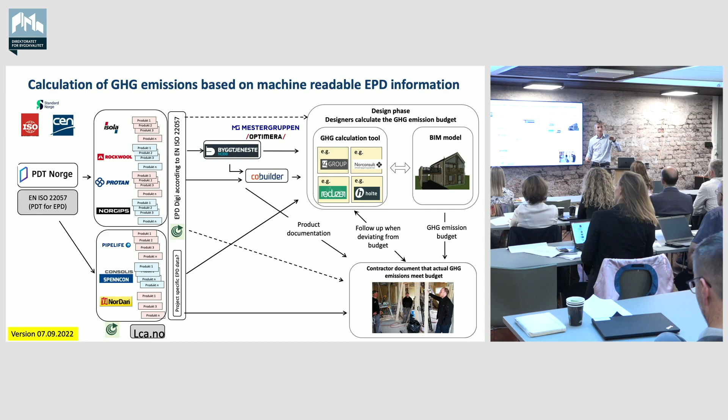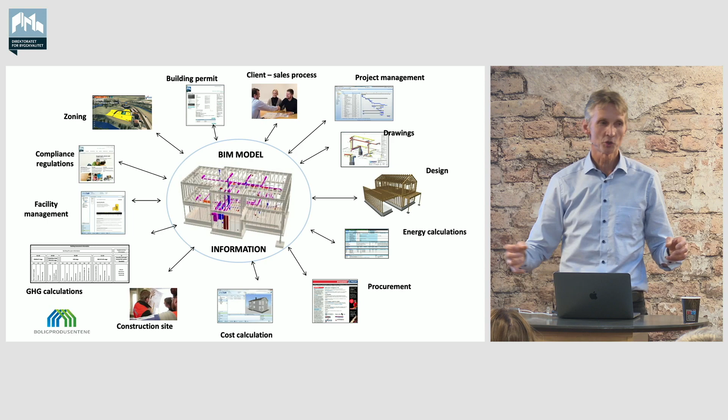And finally, we also have some common work on ID numbers and conversion factors that we will do centrally to help this. But what we then say is we should avoid silos, and we should not look at greenhouse gas calculations as one separate thing. It is a part of everything, and with this data template concept, we have a way of exchanging information. The interesting thing would be how stricter greenhouse gas requirements will affect the whole building process, because we have to work in quite a different way to fulfill this. So, thank you.

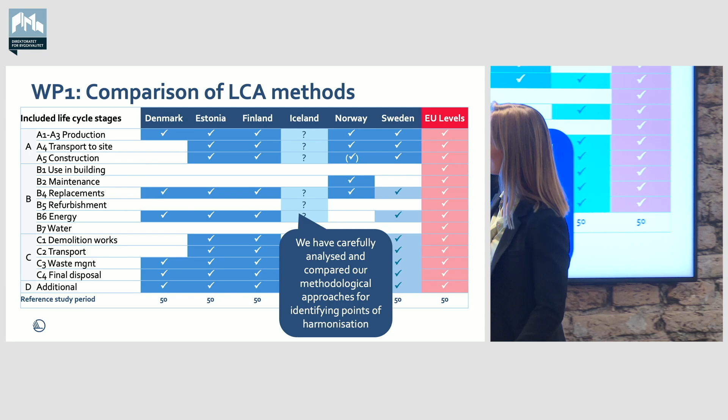So I have some examples, and I'll go through all the packages rather fast, but you saw the slide before. This just shows that even though there are a lot of differences, it's also because the Nordic countries are at the beginning of the phase. There are a lot of details between each phase: what is the area, what do you include in the model, how do you do this throughout the year, what is the lifetime expectancy of the building. All these things we discuss.

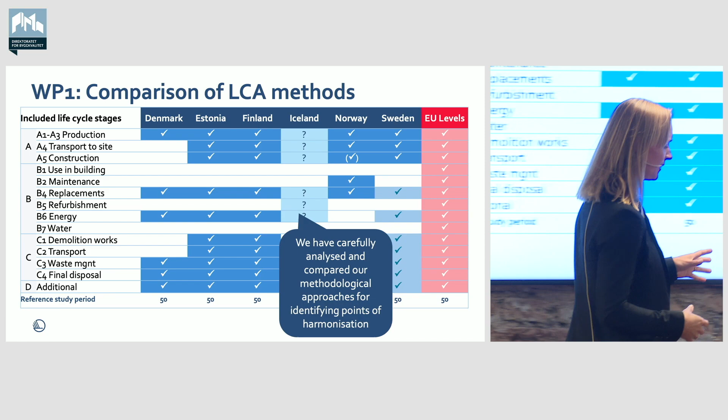It's not always possible for us to agree, because we have our politicians who should make the choices. But what we do is make sure we know what each other are doing, and when we make a proposal for something new, we ask what the other Nordic countries are doing, so that we don't unknowingly make different choices. We try to align as much as possible, as much as is good and reasonable.

Work package 2: if you really want to be more prepared for all the circularity that Philippe talked about, they organize workshops that are free to join, where you can meet other Nordic colleagues and get inspiration on how to make your business model more circular. Concrete steps, which will really be products that will be very much in demand.

Work package 3 has been busy this summer. They started at the European Bauhaus Festival in Brussels, which tries to make a bottom-up focus on the built environment and what should be done there. We shared Nordic perspectives there. Then all the Nordic countries have these democracy festivals, where we discuss many things, and they went around discussing the role of architects in sustainable construction.

More is coming, and we'll hopefully also be at COP27. Next year there will be the UIA World Congress in Copenhagen, where we'll also have some activities, taking the best knowledge we have and trying to put the debate out there.

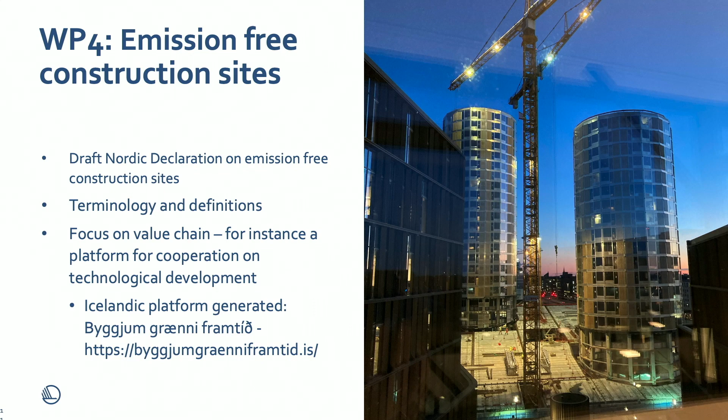Work package 4: we try to make a Nordic declaration on emission-free construction sites. What do we mean by that, and why are we working towards it? We also work on getting the terminologies right.

Work package 5, which I mentioned some of before—I have a red sign, I'm over time—I'll just say that one thing we're also looking into is capacity building activities for reused construction materials. It will be a tender we put out later this year, hopefully, where we'll focus on how to actually use reused construction materials in new or old buildings.

Questions, please put them in the chat for later. If you want to know more—someone asked earlier where to find the information—we try to gather it all here. We can't gather all of it, but a lot is there, and you're most welcome to follow us on LinkedIn and Twitter to stay updated. This program is financed by Nordic Innovation, an organization under the Council of Ministers.

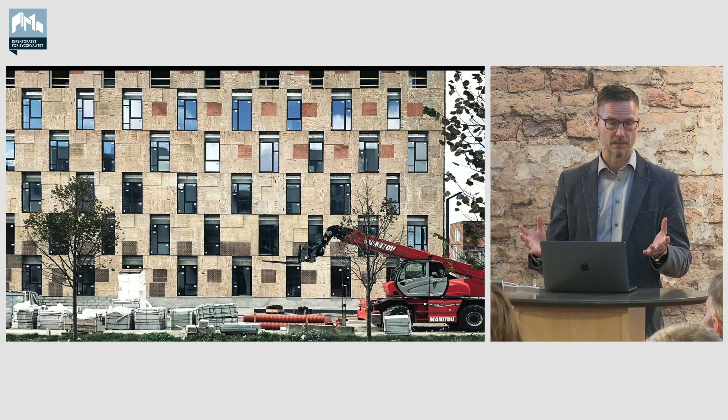That's why we started the project, in which we try to reuse and recycle the policy principles, or the shortcuts through policies, that the Danes have already identified. Of course there are also lots of interesting policies in other Nordic countries that others would benefit from. That's why we started this during the Finnish presidency in the Nordic Council of Ministers.

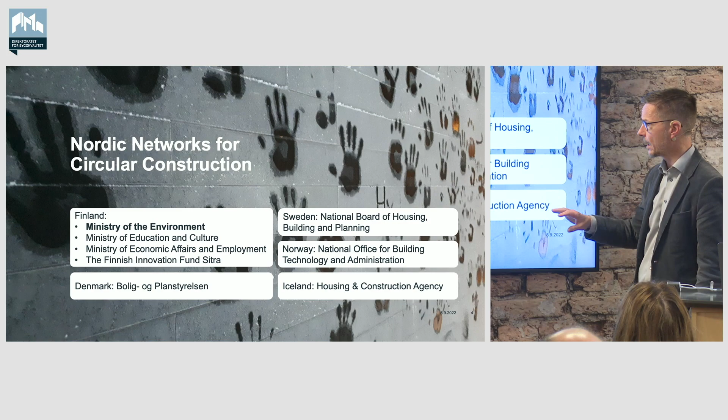We started this program called Nordic Networks for Circular Construction. We got quite a good team for that: 3 ministries from Finland and a Finnish Innovation Fund as well, plus a Danish authority, Swedish authority, Norwegian authority, and Icelandic authority. We are running this with over €1 million in budget for a couple of years.

Could just mention that there is one focused on analysis of barriers and possibilities, asking why can Denmark do this if Finns don't know how to do it in terms of reusing stuff in buildings. And then we are also asking the question, could we actually measure what circularity in buildings is? So how circular is your building? Can you put a number to that?

It might sound a bit naive, I give you that. But there is some development in this field going on in the Netherlands, in Germany, and also the EU's own Level(s) system has some factors that could be used in this exercise. So we are exploring those.

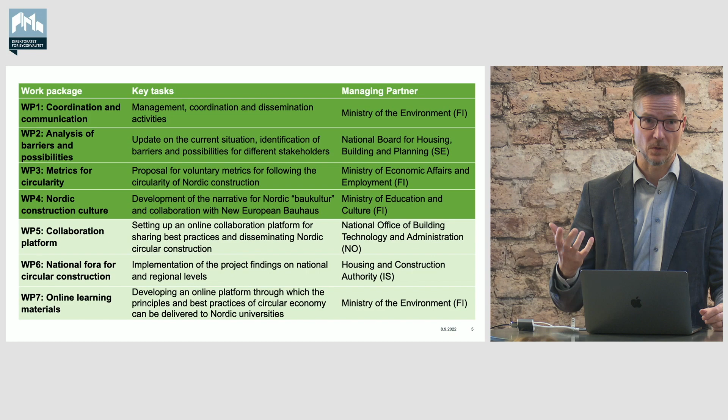And we are of course also discussing how we should change our construction culture so that we would consider something that has had a previous life to be valuable and even desirable. And even if it wouldn't be the romantic weathered brick facade that you can reuse, if it's something super boring and super dull from 1980s bad architecture, can we still somehow learn to accept it, if not love it? So this is what we are working on, also on this more philosophical level, and attitudes.

And then we are going to set up a collaboration platform, arrange national fora for this, and also produce some online learning materials. I'd like to finish by explaining briefly what's our take on circular economy, because there are so many projects dealing with this at the moment.

So we wanted to first start from acknowledging the planetary boundaries and planetary health. These are the boundaries that we mustn't trespass. Then something that's interesting and important for us as humans is of course the cultural heritage of the built environment. That's something that is dear to us, but there is a contradiction between these two. So to which extent can we value this, and to which extent should we just be concerned about trespassing planetary boundaries and health?

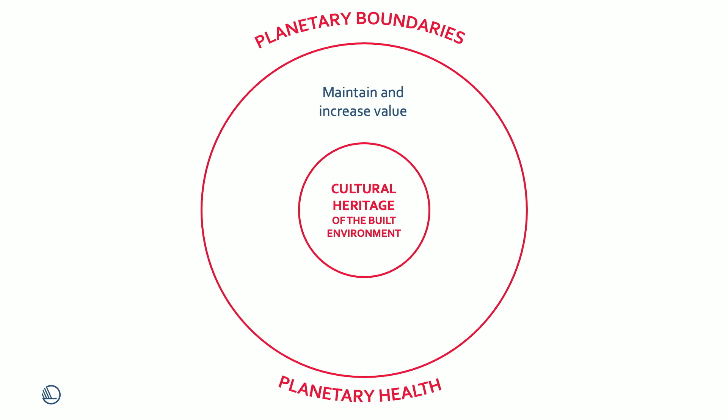So we are trying to maintain and increase the value of cultural heritage in the built environment in four aspects: by developing new business models, by developing digital solutions that we just heard of - very interesting news from Norway, very fascinating - then by enhancing production so that it's less harmful, and also by addressing lifestyle actions.

So this is our take, and I'm inviting you to follow the project and to also attend the events that we are hopefully arranging next year physically. Thank you very much.